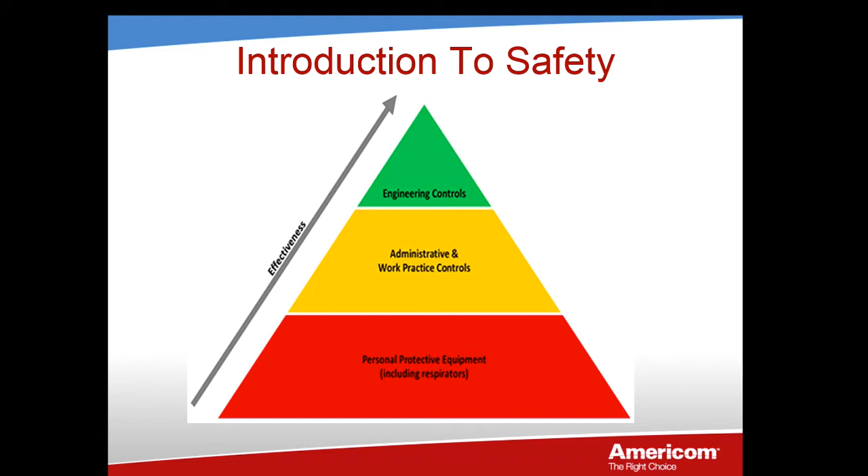So we're going to get into some of the Americom policies regarding safety. This is a serious subject but it needs to be discussed. Grounds for removal from the project - this is your fair warning. Failure to follow Americom's safety policies and our OSHA standards can be cause for removal from a project. Failure to wear your PPE, fighting, weapons possession, and alcohol or drug use or possession on a company project.

Fit for duty, your emergency notification information. Basically that means, do we have your personal contact information? Do we have somebody we can notify in case of an emergency - a friend, a family member? Does HR have this information? If not, please contact Becky Bowman and make sure she has that information.

Make your supervisor aware of any medical problems. So if you have diabetes or asthma, or if you have any required medications, make sure they're aware of that and they know what those requirements are. So if something happens to you, they can help you and better understand your situation. We're not saying you should tell everybody, but just make sure your supervisor is aware if you have any special needs such as that.

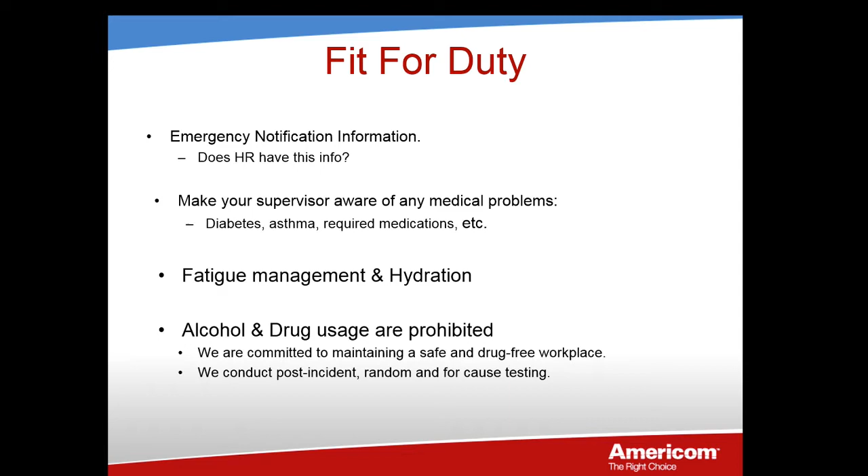Our alcohol and drug usage is prohibited. We are committed to maintaining a safe and drug-free workplace, and just be aware that we do conduct post-incident, random, and for-cause drug and alcohol testing.

So I mentioned this earlier - before you start work, identify and discuss all safety hazards present on the job. If you're not sure what those are, make sure you ask your supervisor. Develop a plan, conduct a toolbox talk, and complete the JHA forms. We have a job hazard analysis form that we require you to complete before you start any job, and that requires you to identify any of the hazards that may be present, so everyone on that project is aware of those hazards and we can prepare and plan to make that project safe.

Make sure you have all your necessary and required personal protective equipment, and I'll go over what that is in the next few slides. Inspect all equipment and tools for hazards before using. Just know that any damaged or compromised equipment should not be used and should be removed from service until it's fixed by a certified professional to make those repairs.

Discuss emergency action planning. Emergency action planning is what we're going to do if there's an emergency - which hospital are we going to go to, who's our first responders, how are they going to get there, do we have the ability to communicate, where's our rally point? Those are all things that need to be discussed at the beginning of each shift, so everybody knows where to go and what to do in the event of an emergency. Does everybody know where the first aid kit is located? I'll go over the emergency action planning in a little more detail in the next few slides.

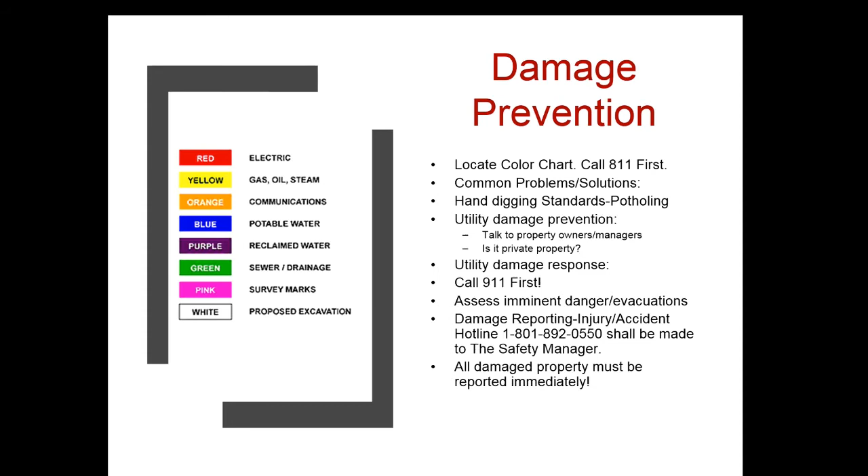Compliance inspection procedures: since we are a construction company subject to OSHA regulations, we could be subject to an OSHA inspection or investigation at any time. This is our policy on how we're going to work through that process.

So what should you do if OSHA shows up on the job? Immediately notify your supervisor, superintendent, foreman, and the safety manager. Do not allow them to walk around the job freely. Advise that you need to obtain your supervisor's permission before you allow them to walk about the project.

OSHA is required by law to follow certain procedures during inspections. First, they must present their credentials. Then they conduct an opening conference, where they meet with the management team to discuss their concerns - maybe they received a complaint, and that's the point where they'll bring it forward.

Once everybody's comfortable with the opening conference, they'll conduct a walk around, where they typically identify any issues or concerns. Then they'll bring those issues to us at the closing conference, and issue citations if they feel that's appropriate.

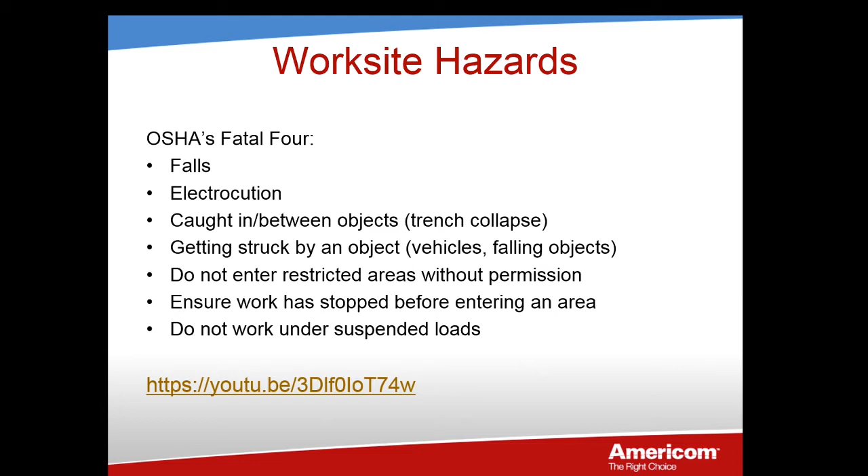So again, continuation of construction's fatal 4 hazards. Out of 4,674 worker fatalities in the private industry in calendar year 2017, 971, or 20%, were in construction. That is 1 in 5 worker deaths in 2017 were in construction.

The leading cause of private sector worker deaths, excluding highway collisions, in the construction industry were falls, followed by struck by objects, electrocution, and caught in between, as we just saw in the last video. These fatal 4 were responsible for more than half, or 59%, of construction worker deaths in 2017.

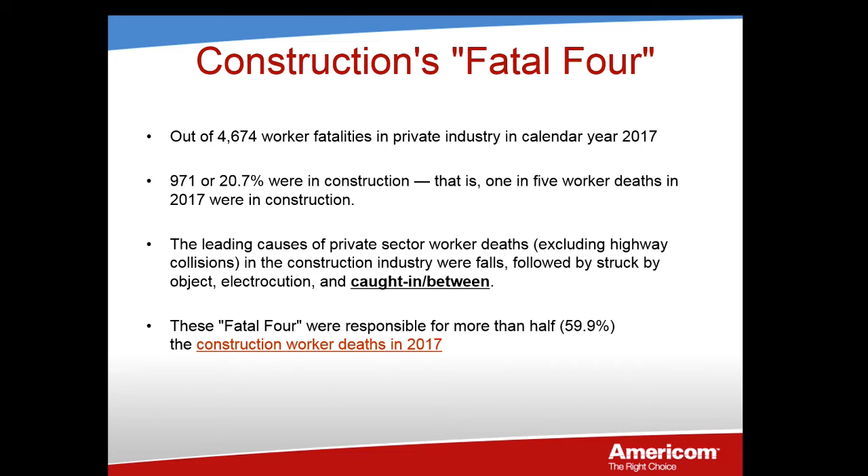So some pretty compelling statistics there. And this is the data that OSHA uses to identify what those fatal 4 hazards are.

The other personal protective equipment that you might need - are you prepared for the weather? Are you prepared for the heat or the cold? Do you have water, food, sunscreen, clothing? Obviously, those things will not be provided by Americom.

Our policy is that you must wear long pants, no shorts, and a long or short sleeve shirt, no tank tops. Footwear must be durable leather with a slip-resistant sole. Some jobs require steel-toed boots, so you'll need to ask your supervisor if your project requires them. Americom doesn't have a policy requiring steel-toed boots - it's a good idea and I recommend it, but bare minimum, you just need a durable leather boot that goes up over the top of the ankle to protect your ankle.

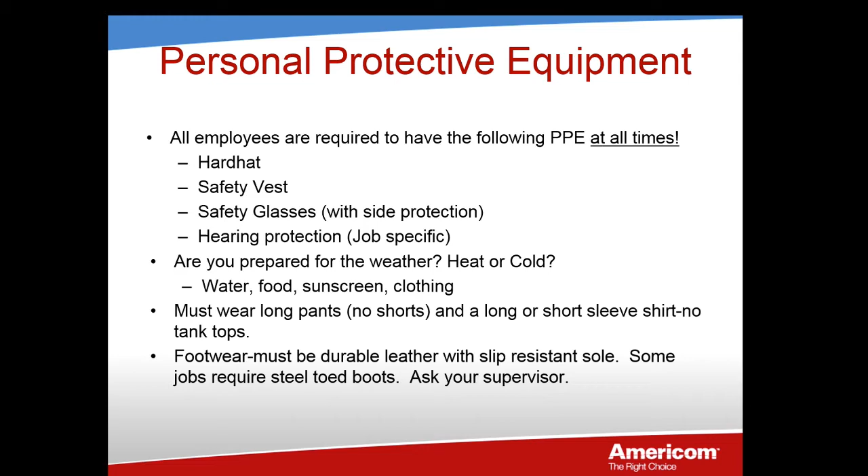Some ways that we can prevent our ergonomic injuries are by conducting warm-ups, stretching, and flexing. We've implemented a stretching program to try to prevent injuries associated with repetitive motions. All work performed should utilize safe ergonomics and lifting practices.

Try to do 3 to 5 short stretches per day. Stretch before you start work, stretch in the middle of the day or when you get the opportunity, stretch after lunch, and then stretch after the work day's done. The stretching and flexing will help you prevent injuries down the road and throughout the day.

Going back to our safety triangle, if you're doing a lot of repetitive motions and you start to feel a strain, we can implement administrative controls to try to manage those types of repetitive motion injuries.

After prolonged static posture, such as driving to the job site, or after doing a lot of repetitive job tasks, these are the types of injuries that can occur. You're lifting with your back instead of your legs. You want to make sure you have good posture when lifting something, especially a heavy object over 50 pounds. If you're worried it could hurt your back or it's in an awkward position, find someone to help you move it rather than trying to move it yourself.

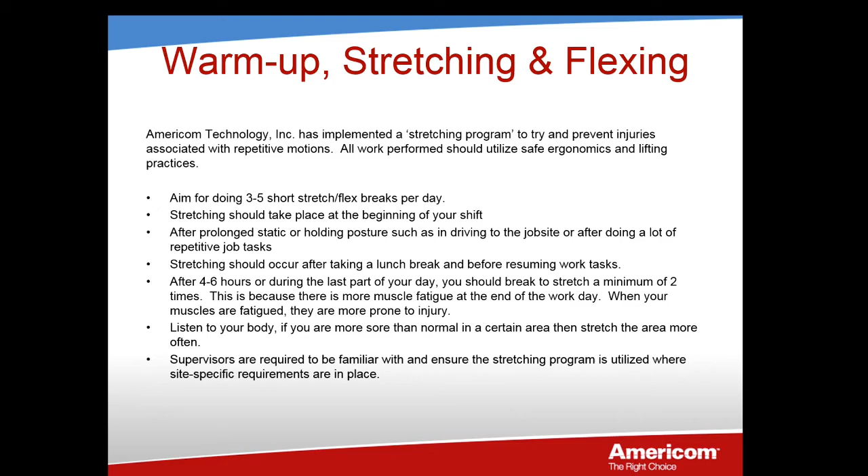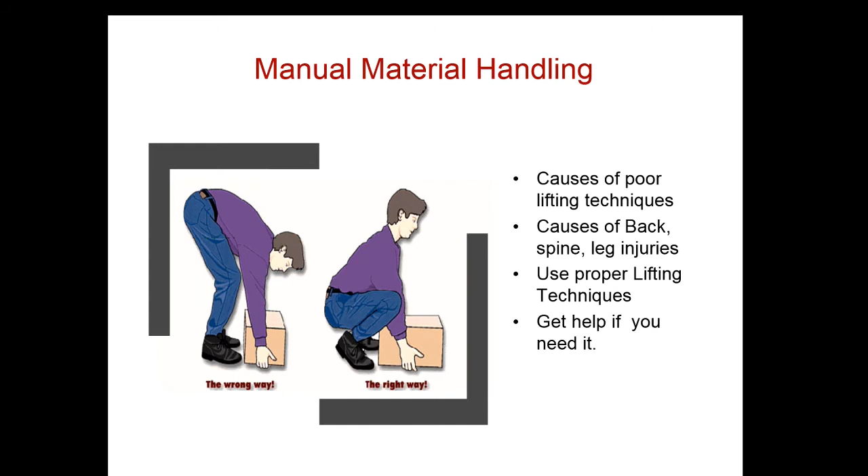These are some of the causes for poor lifting techniques, and causes for back and leg injuries. So again, use proper lifting techniques, and get help if you need it.

We also have a heat and cold stress plan. While working in hot weather conditions, the human body may not be able to maintain a normal temperature just by sweating. If this happens, heat-related illnesses may occur. The most common health problems caused by hot work environments include heat stroke, heat exhaustion, heat cramps, heat rash, and dehydration. Some prevention methods include acclimation—acclimate to the area you're working in.

Again, we talked about engineering controls—maybe we need to get some fans or evaporative coolers in there.

Safe work practices: for employees working outdoors or indoors without heat, take scheduled breaks in warm areas. Listen to your body and make sure you're not exerting or overwhelming yourself. Ensure there's plenty of water to drink or fluids with electrolytes, and take breaks as needed. Immediately report any problems to your supervisors. Supervisors should consider scheduling work around weather conditions. So let's work smart, not hard.

Personal protective equipment is an important factor in preventing cold stress-related injuries and illnesses. Employees should adhere to the following recommendations when dressing for work in a cold environment—if we're working in a cold environment, we want to wear layered clothing.

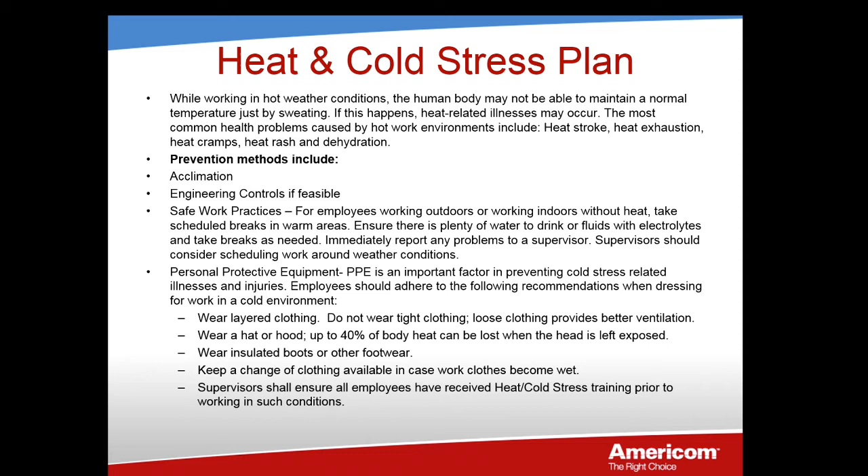Supervisors shall ensure all employees have received heat cold stress training prior to working in such conditions. So if you're a supervisor, just know that, make sure you're talking about this as part of your toolbox, your morning JHA toolbox talk. Hey, it's going to be cold today. We got to make sure everyone's got the right personal protective clothing. And if someone doesn't, make sure that they get it, or they obtain it before they come to the job.

Our hazard communication, that's a term you'll hear in the safety regulations. It's also known as HAZCOM. It's a globally harmonized system. It's called the GHS system. It ensures information about chemicals, including information and ingredients, can be universally communicated.

So basically what that is, it's talking about the safety data sheets. Those are the sheets that a manufacturer of a chemical will put out, and pre-identify all the safety hazards or precautions you should take while handling that chemical or that material. SDS sheets are available here at Americom in the main offices, and should be available on the job site, if you are working with those types of chemicals.

Safety data sheets provide all information necessary to safely handle a particular chemical, must be readily accessible to all employees using a hazardous chemical, and any chemical identified with a label that states danger, caution, or warning must have a safety data sheet. So again, this is our HAZCOM, and if we're introducing or working with a chemical that we're not familiar with, make sure you take the time to review those safety data sheets so you're educated and prepared, and you have the proper and necessary personal protective equipment while you're handling that chemical.

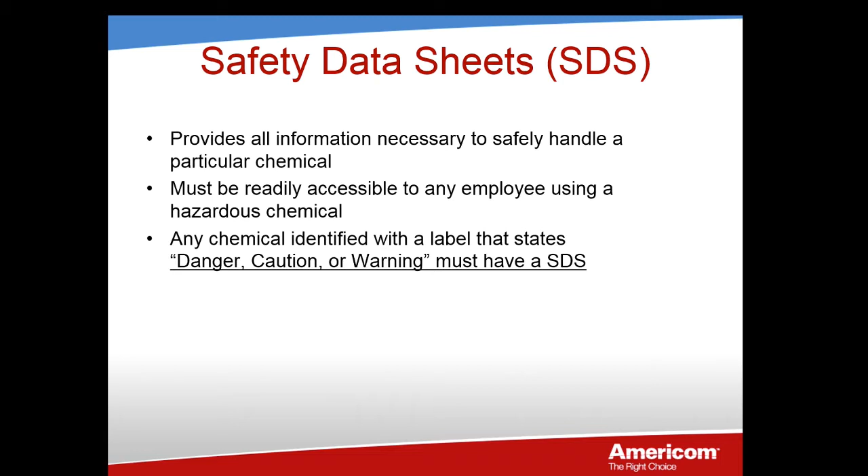Okay, now we're going to get into our electrical safety and GFCIs. So recognize hazardous energy sources. If we're working in and around electrical or hazardous energy sources, point that out to everyone there on the crew. Make sure they're aware of it.

OSHA requires that GFCIs are used, inspected, and tested. Electrical cord inspection and use. Damaged and defective electrical equipment should not be used and should follow proper procedures.

Locks, tags, lockout, tagout, control hazard energy sources. So if you can control that energy source before you start the work, what that means is we would want you to lock it out, tag it out, shut it down, de-energize that energy source before you go in and perform the work you need to perform, so that project or that job site is safe for you and everybody there.

Overhead line protection, make sure you're pointing out overhead power lines to everybody there on the crew. Again, that should be discussed as part of your JHA job site safety toolbox meeting first thing in the morning. Identify the clearance distances and shielding. If you need any shielding in place, you can set up barricades to keep people from encroaching or getting too close to those overhead power lines.

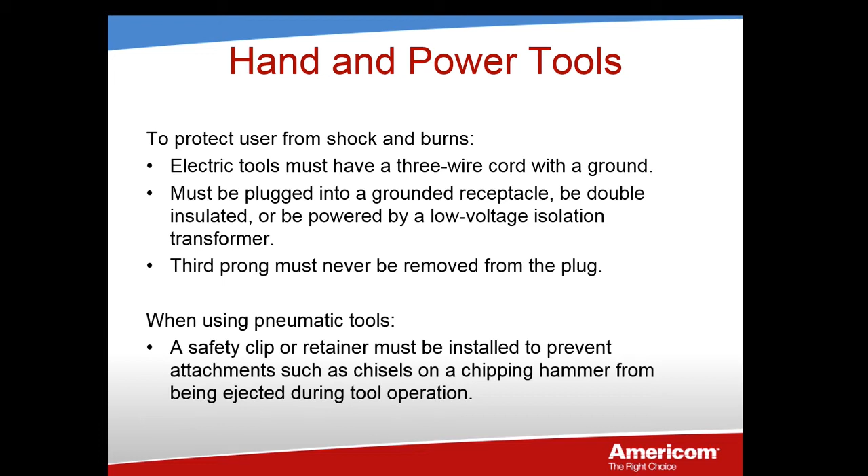If an air hose is more than a half inch in diameter, a safety excess flow valve must be installed at the source of the air supply to reduce pressure in case of hose failure. Pneumatic power tools must be secured to the hose with a whip check device to prevent accidental disconnection.

Most of our air hoses and pneumatic air tools have that feature built into the hose - it's a little clip that clips into the tool you're using. You don't ever want to use an air hose that doesn't have that on there, because that air hose could come off and start whipping around and hit you or somebody else on the project.

Powder actuated tools operate like a loaded gun and must be treated with extreme caution. You're technically required by OSHA to be trained and certified before using powder actuated tools. If you haven't had that training, notify your supervisor, make them aware you haven't been trained. Proof of training must be with your operator at all times - similar to a driver's license or forklift certification, you've got to have that certification that you know how to use that powder actuated tool.

The forces generated from that tool are similar to a firearm. If you use that tool incorrectly, say you're using a Hilti gun and punching nails into concrete, if it's not used correctly, that nail could easily go through soft tissue or bone and cause very severe injuries.

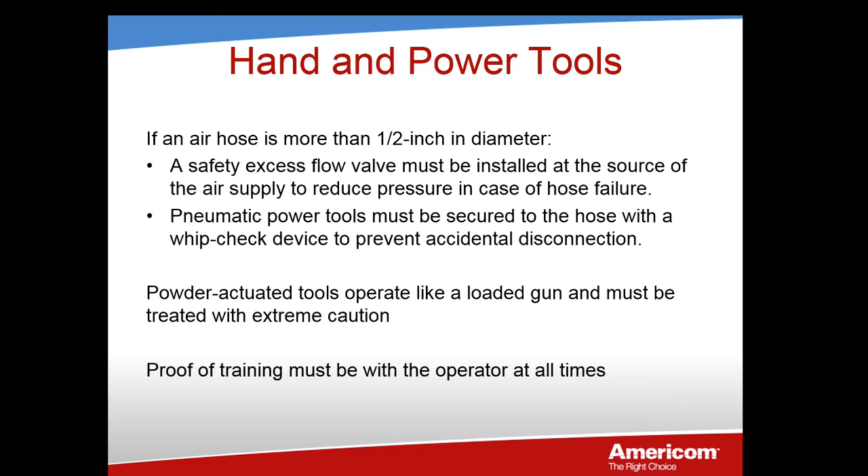Moving on to ladder safety. We want you to choose the right ladder for the job and inspect those ladders daily. Damaged ladders must be removed from service. So if you see any ladders that are bent or dented, or don't seat properly, they're out of balance, they need to be removed, and you need to get a different ladder.

As you're using the ladder, you need to maintain 3 points of contact when using it. So what that means is you have 2 feet and 1 hand on the ladder, or 2 hands and 1 foot.

Secure the ladder. We must have 3 feet above any landing. So if you're using just a regular ladder that props up against a building or a platform, there needs to be 3 feet above that platform that you're accessing, per OSHA regulations.

Always face the ladder when ascending and descending. You never want to walk backwards down the ladder.

Don't reach out past the rungs of the ladder. Get down and move the ladder if necessary. So if you're on the ladder, the rule of thumb is if your belt buckle or your belly button extends out past the outer rail to either side of the ladder, then you're outreaching and you're putting yourself at risk for a fall or injury. So just, again, slow down, take your time, get down, move that ladder if you need to.

The ladder must be rated for the intended load, so that's combined weight. So for example, if you're a 250-pound man, but you're only on a ladder that's rated for 200 pounds, then you've got to get a different ladder. You've got to get a ladder that's rated for not only your body weight, but the weight of the material that you're working with or using.

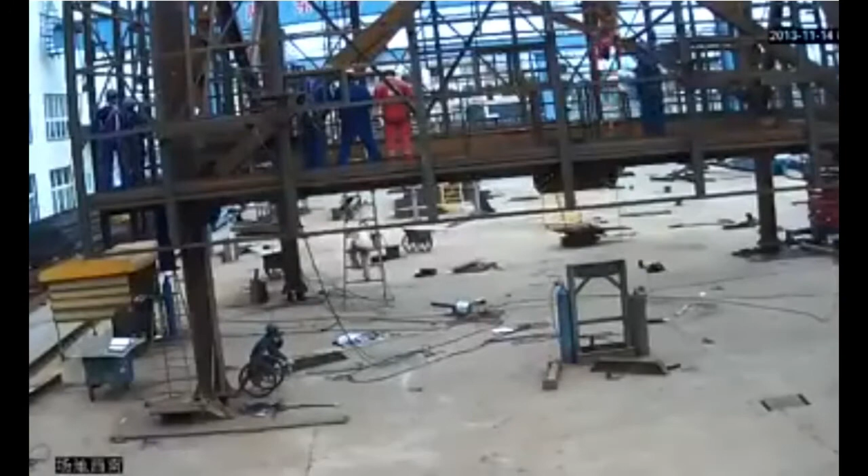So here we have a multiple level project. We got people working below and we got people working above. I want you to pay attention to this gentleman right here with the plans. Here he's carrying a set of plans up the ladder and he loses his balance and falls. So pretty serious injury there.

If everybody noticed, his arms were straight up in the air when he landed. That's an indicator that he was immediately knocked unconscious and likely suffered pretty severe internal injuries, if not head injuries. If you notice, when he came down, he landed on his shoulder blades, his back, and his head.

The point being here with this video is, again, we want you to use ladders safely, but never carry anything up the ladder. Use a helper. So if you're working on a ladder and you're working with materials, we want you to ascend to the work area where you're going to be using the ladder, and then have someone lift the materials up to you. Have them hand the materials to you rather than you try to carry those materials up yourself.

Some ways that we can do that is we can use ropes. Somebody on the next level could be lifting that material up to you with a rope. But again, we never want you to try to lift that material up the ladder by yourself. And same, if you're using, say, a long 2x12 or something to that effect, we don't want you using multiple ladders with multiple people on the ladder and then trying to lift that material up into place. We need to find another means of getting that material to the area where we're working on that ladder.

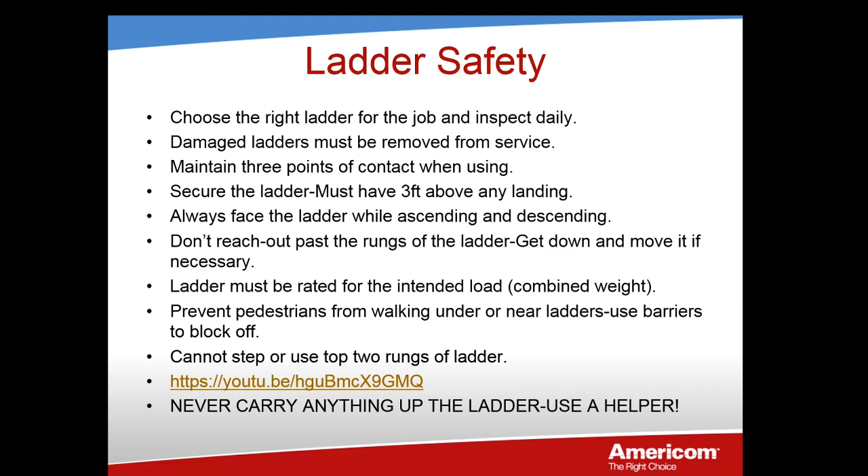So when do you need fall protection? OSHA says in the construction industry, if you're more than 6 feet above the ground or any working area, and you're not protected by a system of guardrails or safety nets. So if you're up on a second level and there's no guardrails that would prevent you from falling, then you need to have fall protection, or you need to wear fall protection. I'll explain what that is here in just a second. Or there needs to be safety nets, which are objects or safety devices that extend out past the platform and are designed to catch you in the event you fall off that platform.

So again, you must be tied off above 6 feet. You need to wear a body harness. You need to inspect your harness daily and make sure it's not damaged, and if it is damaged, it must be removed from service. Make sure you're always connected before starting your work. So if there's no other guardrails or safety nets in place, then you need to wear a harness. The harness needs to have a lanyard connected to some sort of device that will prevent you from falling.

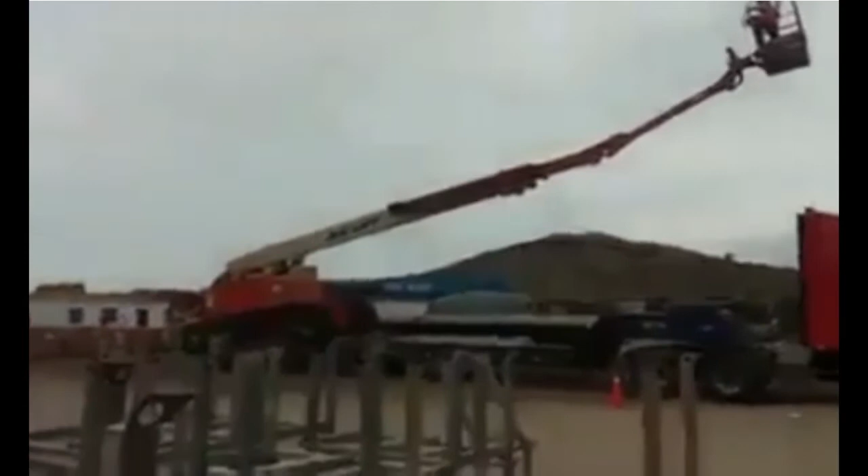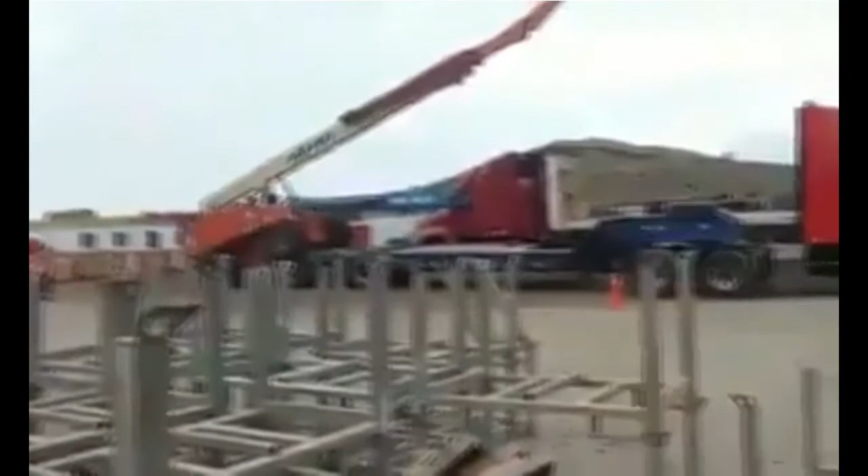So here we have a gentleman up here, you can see on the top right, that's operating a boom lift. You can't really see him right now, he'll come into picture here in just a minute. But he loses control of this boom lift, and he actually gets ejected out of it. The only thing that saved this gentleman's life, I believe this person would have received fatal injuries had he not been wearing fall protection. You see here, he's trying, I'm not sure what he's doing or what he's trying to get to, maybe this power pole here on the right. But you'll see here, he tries to lower the boom on the lift and then loses control of it.

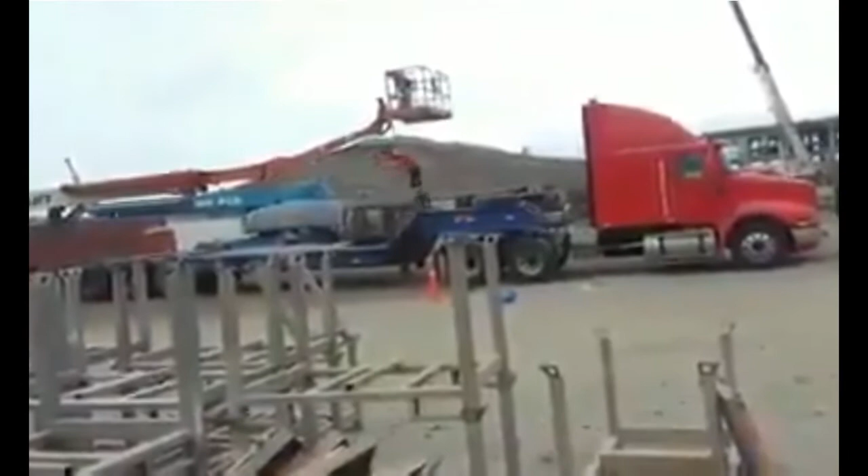So this guy, he's alive, he's still conscious, he's still moving. He's definitely going to be sore in the morning, but that fall protection saved his life. So again, he was probably 20, 30 feet in the air. He's required to have fall protection while operating this boom lift, and that, in this particular incident, saved his life.

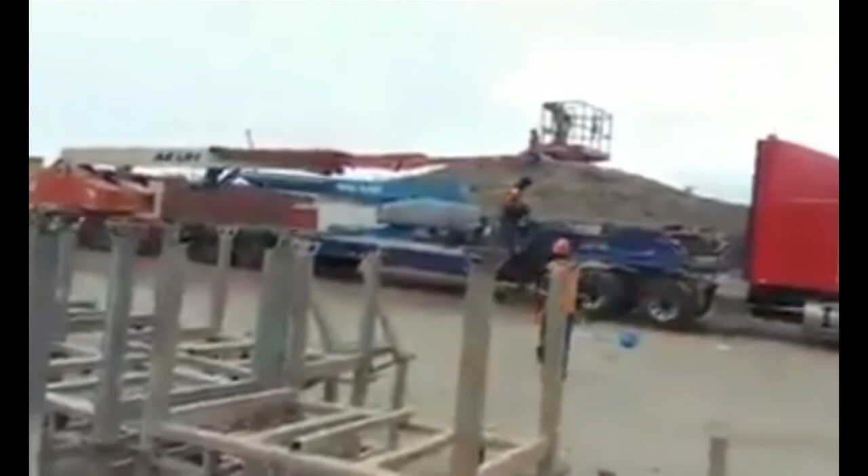These crew members will go over and help him get down here. You can kind of see here, I'm not sure if they even had a plan on how they're going to get him down, but another gentleman lowers the boom the rest of the way and they get him down safely. But people were kind of standing around there wondering, I think they were in shock and not sure of what to do.

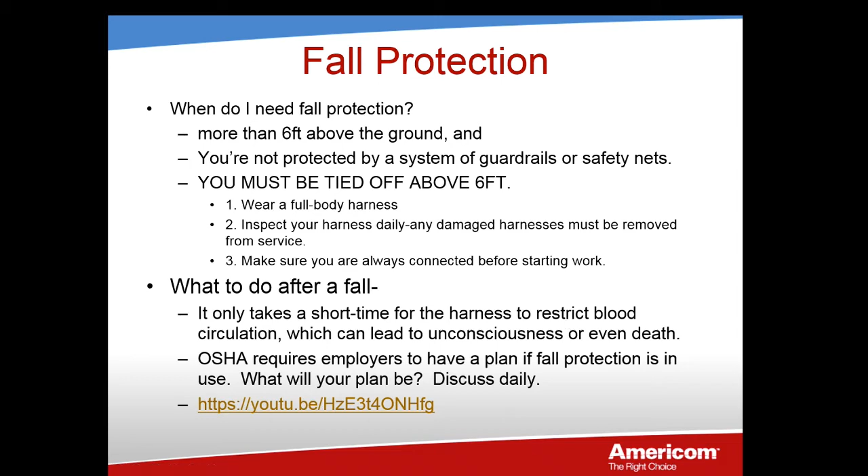Okay, so moving on, we're going to talk about heavy equipment operations. Heavy equipment is our backhoes, our mini excavators, our large trucks, dump trucks, mud trucks - anything classified as heavy equipment is going to be probably most of our commercial vehicles, or not probably, but will be all of our commercial vehicles. Anything that has a very high weight rating.

Do not operate vehicles in reverse with an obstructed rear view unless it has a reverse signal alarm capable of being heard above ambient noise levels, or a signal observer indicates that it's safe to move the equipment.

So signal observer is just a spotter - you're basically recruiting someone to help you move that heavy equipment, to be an extra set of eyes and ears. If you need to move a piece of heavy equipment, that person's going to help you be aware of blind spots. You want to make sure you understand and know what your blind spots are in that heavy equipment.

I'll show you a slide here in a second that shows you how big some of those blind spots can be. Make eye contact with the operator when entering their work area. If you're moving heavy equipment, you're working with somebody and making eye contact - maybe you need to use hand signals or radios to communicate effectively. Make sure you've got a plan in place when you're moving that equipment.

Did you realize backing accidents are the leading cause for all DOT vehicle accidents, including single and tandem dump trucks, which the majority of you will be driving, as well as tractors with lowboy trailers and even pickup trucks. Backing is one of the more difficult vehicle maneuvers to master, especially with larger type vehicles. It shouldn't be taken for granted. The Smith system is used as a teaching method for DOT fleet safety training. It emphasizes to the driver to aim high in steering, get the big picture, and keep your eyes moving. This may seem like a simple and practical approach when you're going forward, but when backing, it's a different story.

Inattentiveness, distractions, being rushed, and common carelessness are contributing factors in most backing accidents. Being distracted even for a few seconds can lead to a critical error when it comes to backing. When we're backing, we need to get the big picture so that we know what is behind us or what could possibly move into our backing path. Carelessness causes too many backing accidents resulting in injury or damage. Many of these accidents could have been prevented if individuals were more attentive and cautious. Failure to do so may compromise our safety and the safety of others around us.

Stop! Stop! Hey! Stop!

As a general rule, avoid backing unless you absolutely have to. When backing is required, use extreme caution and know what's behind you.

Survey the area where backing is to occur as you pull in. Choose the best backing path and pull forward until you're properly aligned. Get out and look at your blind spots and check for adequate clearances in your backing path.

Typically, your blind spot directly behind the dump truck can go back as far as 90 feet for workers standing. If that worker is stooped over or kneeling, as would be the case for someone inspecting the roadway, the driver's viewing distance using side mirrors increases even further.

Worker cannot be seen in driver's side mirrors at 25 feet. Still can't be seen at 50 feet. Even at 75 feet, worker can't be seen. Finally, at 90 feet, the worker can be seen in side mirrors.

You must always know what is directly behind you prior to backing. If a spotter is not available, complete a walk-around. Having a spotter is the preferred method. If a spotter is available, make sure you agree on hand signals to be used.

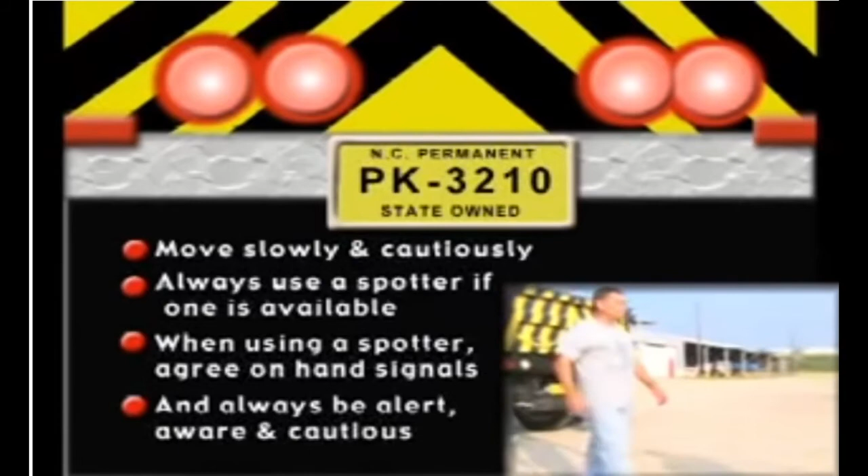When using a spotter, agree on hand signals. And always be alert, aware, and cautious. Our DOT family needs employees like you to help keep our coworkers safe. You are under tremendous pressure and challenged to do your job in a safe, efficient manner. Please don't forget, on the job, as in life, always watch your back.

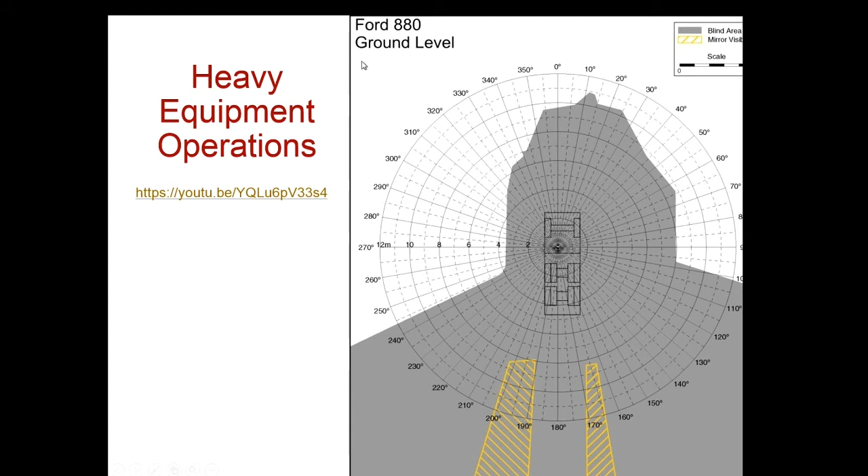Okay, so we're going to move on.

So now we're going to talk about directional drilling. This is one of the main types of work we do here at Americom. And so we're going to discuss the hazards with directional drilling.

So the hazards that come into play when operating or working in or around a drill are your caught-between hazards, loading and unloading. So if you're loading the drill on a trailer or off the trailer, we're talking about moving heavy equipment, and we need to be using a spotter. We need to make sure that we're not going to back or load that piece of equipment and get something or someone caught between that piece of equipment.

As we're moving it, we again want to use a spotter, make sure we're not going to strike anything or anybody with it. If the drill's being used, and we're drilling a bore in the ground with the drill, it's got rotating, moving parts. You want to make sure you keep that area safe so that someone or something doesn't get drawn into the rotating parts and pulled into that machinery.

Falls: the drills aren't that big, but we do have some drills that are fairly big, and we want to make sure that we're conscious of any falls that could come from working in or around those drills. Especially if we've excavated and there's an open hole in the ground, there could be a potential to fall into that hole, just depending on how deep it is.

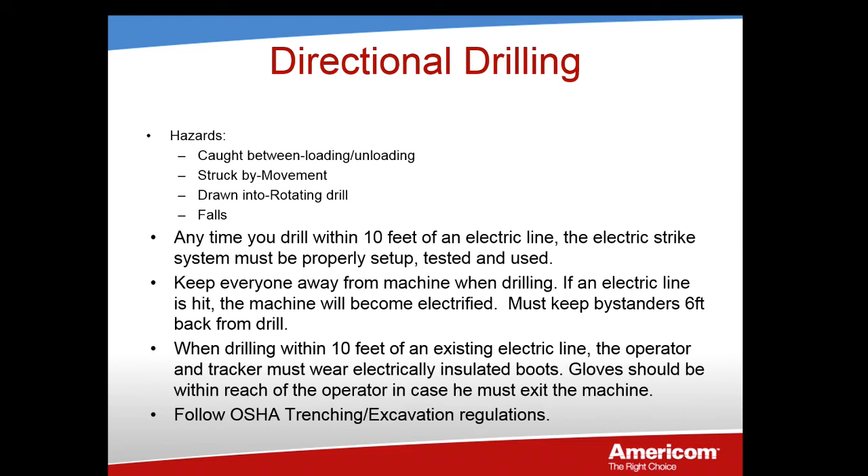And if there are any open excavations in and around the drill, we're required by OSHA to follow the trenching and excavation regulations, and I'll talk more about that in the upcoming slides. So, excavations.

An excavation is any man-made cut, cavity, trench, or depression in an earth surface that is formed by earth removal. A trench is a narrow excavation in relation to its length made below the surface of the ground. In general, the depth of a trench is greater than its width, and the width measured at the bottom is not greater than 15 feet.

Please note, if a form or other structure installed or constructed in an excavation reduces the distance between the form and the side of the excavation to 15 feet or less, measured at the bottom of the excavation, it is also considered to be a trench.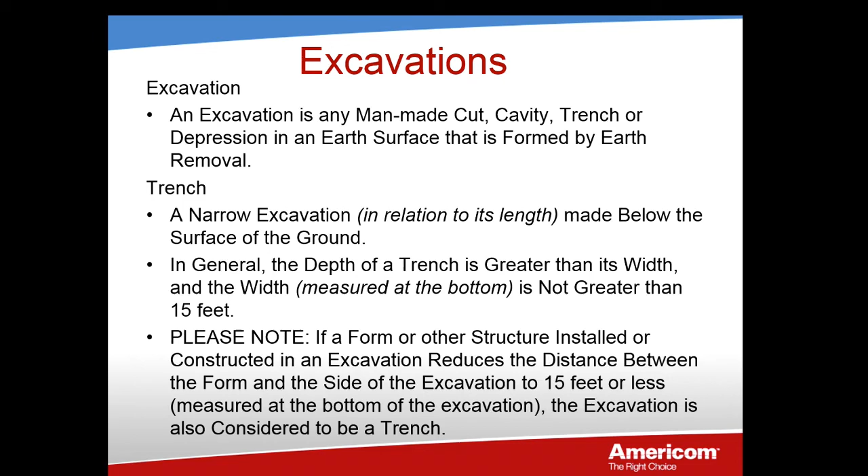So what are the requirements? Utilities must be staked before you dig, we've already discussed that. You must conduct a soil test to determine the best type of protective system to use.

For a soil test, there are 4 different types of soil. There's solid rock, there's Type A. Type A means it's undisturbed soil, it's never been touched before. Type B means it's solid, clay, hard soil, but you can tell it's been disturbed. And then Class C soil is your sandy, loamy soil, and basically has no consistency. You can't roll it up into a ball, or it just doesn't stick in any way, shape, or form.

Excavations or trenches 5 feet or more in depth require benching, shoring, or trench boxes. So it requires some sort of protective system be utilized if the trench is deeper than 5 feet.

Excavations or trenches 4 feet or more in depth must be monitored for hazardous atmospheres. So what that means is if you've dug a trench near a sewer line and it's 4 feet or more in depth, then you need to conduct a hazardous atmosphere test to make sure that none of those sewer gases are in that trench and would pose a hazard to the worker in that trench.

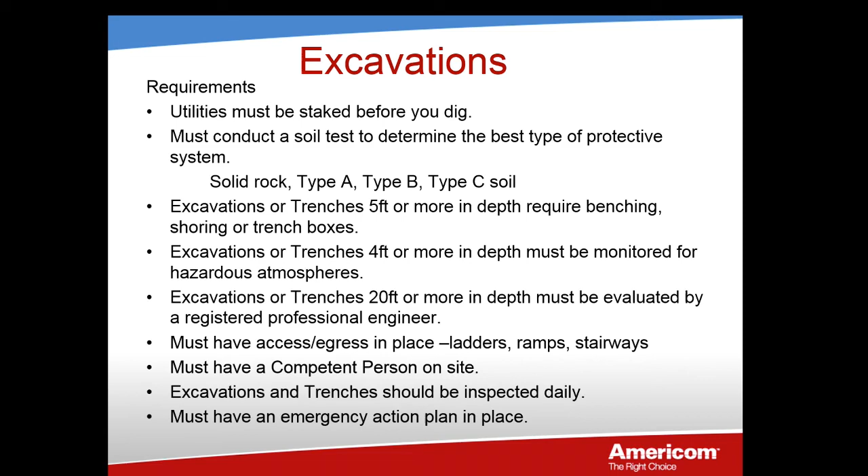Here's a slide with two photographs. On the right, a good demonstration of a proper excavation with the proper safety measures in place. On the left, a photograph of an excavation with essentially no safety precautions in place. I'm very nervous and scared for the gentleman down in that trench. That soil looks like type C soil to me - pretty soft, pretty sandy. There's no way that gentleman's going to get out of that hole if it caves in on him. On the right, you can see they've got forms in place that extend up higher than the excavation itself. So if that excavation does collapse or cave in, those shields are going to protect anybody down in that hole.

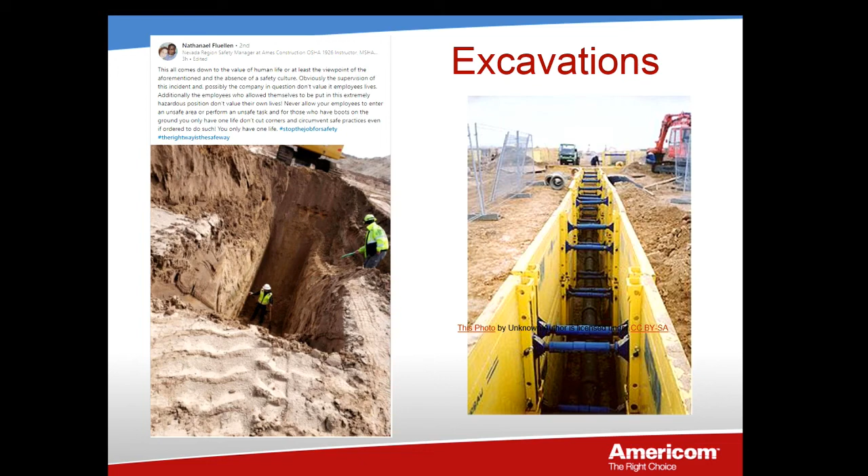This occurred in Alpine, Utah, just back in April. This was a man who died in a trench in Alpine, Utah - I believe he was installing a swimming pool. There were essentially no safety precautions in place, and as he was down in the hole, the trench collapsed and killed him. These things do happen, and they happen here locally. Going back to some of the previous slides - if we're conducting work in and around excavations and trenches, and it's deeper than 5 feet and it doesn't appear safe, or there's water in the hole, or you're not comfortable with it, we need to stop, evaluate, and get the proper protective measures in place to make sure that trench or excavation is safe before we enter and perform any work.

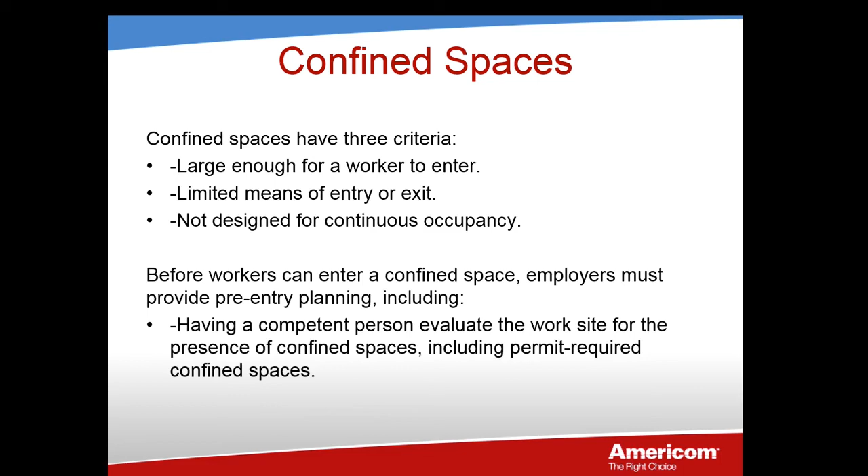Okay, so we're going to move on to confined spaces. Confined spaces are one of the most dangerous work areas in construction, and the OSHA regulations are very specific. But today, since this is a new hire orientation safety training, we're just going to cover the basics. First I'll define what a confined space is. Confined spaces have 3 criteria: they're large enough for a worker to enter, they have limited means of entry or exit, and they're not designed for continuous human occupancy. Before workers can enter a confined space, employers must provide pre-entry planning, which includes having a competent person evaluate the worksite for the presence of confined space hazards, including permit required confined spaces.

Just know that there's a difference between a permit required confined space and a non-permit required confined space. The difference is: if we're down in a vault or a hole and there's absolutely no hazards, we've monitored the environment and atmospheric hazards and identified there's no hazards - we've identified that the oxygen level is where it needs to be. Hazardous atmospheres must be eliminated or engineering controls must be in place, and oxygen must be between 19.5% and 23.5% for it to be safe. So if there's no electrical, no water, and the oxygen is sufficient, then we could potentially call that a non-permit required space. But if we identify there's electrical in the hole, oxygen deficiency, or maybe some caustic gas down in the hole, then that is a permit required confined space, and we're required to follow certain procedures to render that confined space a safe environment to work in.

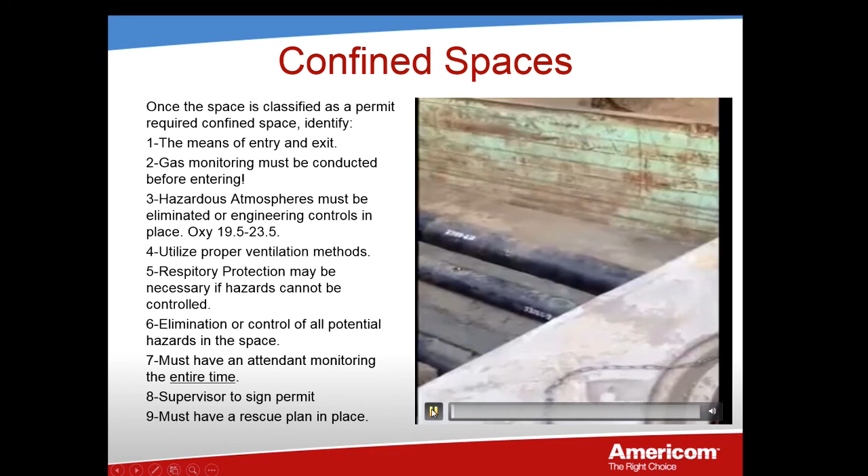I'm going to play a video here that shows a confined space situation that goes bad, and then we're going to talk about it. As they're working in here, I want you to pay attention to the things that they're saying.

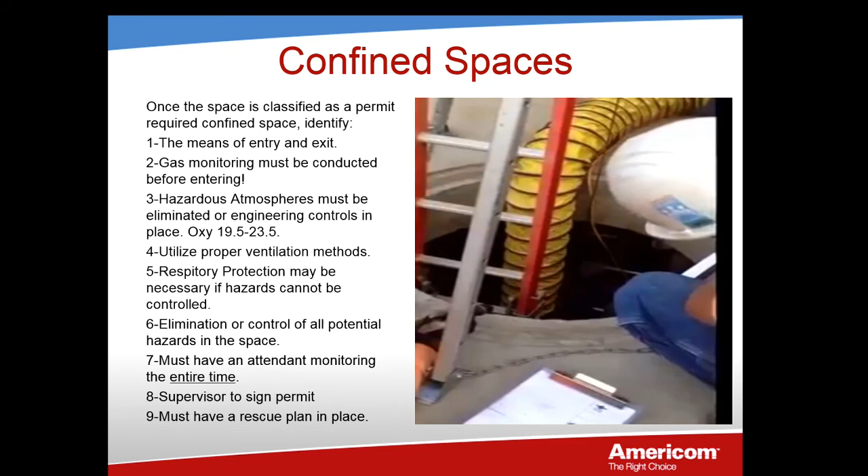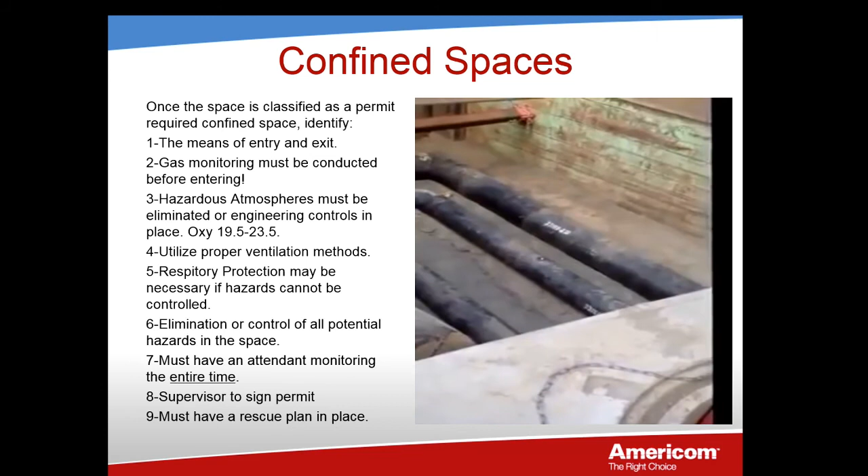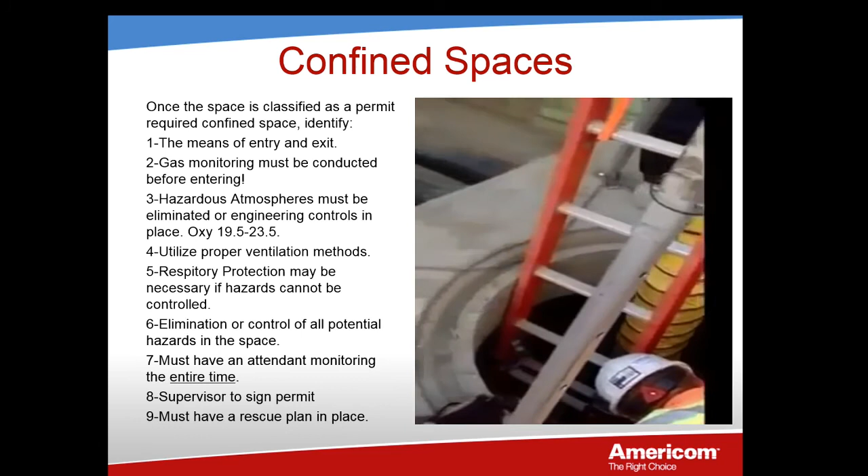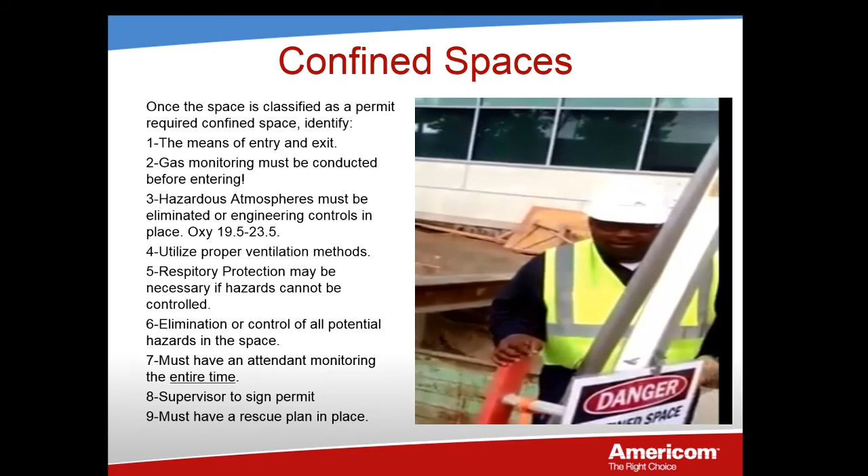I wouldn't want to be in that hole right now. You kidding me? I know. Couldn't pay me enough to do that, Joel. You guys wonder why we check that? That didn't sound good. That's why we check torque on bolts, guys. Yeah, Joel, maybe you should step out for a minute so that thing settles in. Yeah, no.

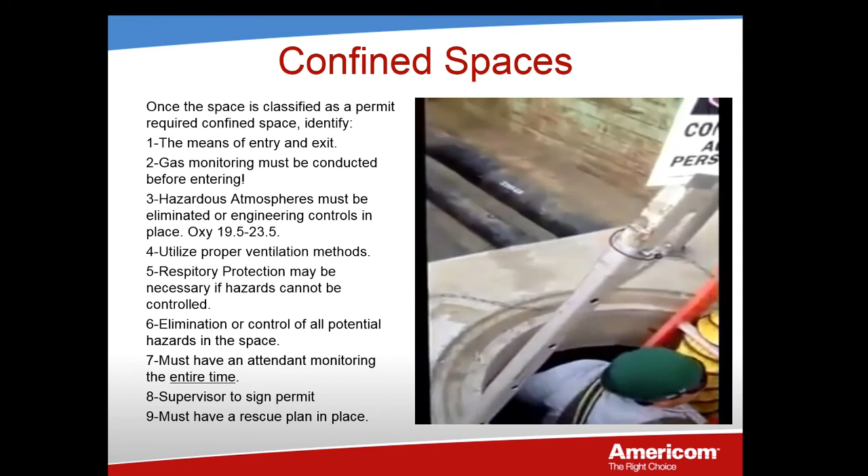Okay, so I'm going to stop the video there. There's not much more to see after that. This video does have a happy ending - this worker does survive. He's just blown out of that hole and banged up pretty good, but he does survive.

These gentlemen were working in a confined space or manhole where there were steam pipes, and I think you could hear at the beginning that loud clunking sound. That was some sort of problem occurring with the steam pipes themselves, and eventually the pipe ruptured and blew him out of the hole.

But more importantly, I want to discuss some of the things they were saying. At the beginning of the work, it looks like they had everything they needed in place. They had their access and egress in place - you saw the ladder coming out of the hole. They had their ventilation in place. They had a tripod set up, and they had the gentleman hooked up with a safety harness, and that safety harness was hooked up to the tripod so they could winch him out if needed. They had a danger sign in place.

But more importantly, some of the things they were saying, like 'man, you couldn't pay me enough to be in that hole' or 'hey Joel, maybe you shouldn't be down in that hole' - everybody needs to understand as you're watching this video that if you're not comfortable with the work being conducted and you're making statements like that, then we need to be more decisive and just get that person out of the hole.

So we're going to touch briefly on crane operations. We don't do a lot of work here at Americom with crane operations, but we do have some cranes on the drills that we own and operate. So we're going to touch on this briefly.

Crane ground conditions: the controlling entity must ensure ground conditions are safe for the crane to be assembled and used. During assembly and disassembly, the director determines if safe ground conditions are present. That's basically the person in charge, whoever's running or operating that crane or certified to use it. They're in charge of making sure it's set up and assembled properly, and that the area they're working in is safe.

Again, OSHA standards are that nobody is allowed to work under or near a crane as it's being operated. Cranes must remain a minimum of 10 feet from overhead high voltage lines. So there's that 10-foot rule again.

The employer must assume that overhead high voltage lines are energized unless the utility confirms they are not. So again, if you see an overhead power line, just assume it's energized unless the utility company confirms it's not. And if we're going to assume that overhead power line is energized, we need to set up all the necessary precautions and safety measures we've discussed previously.

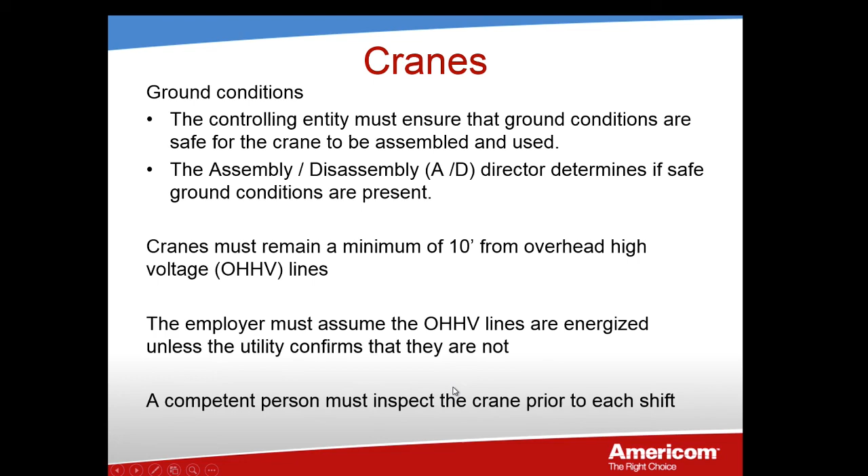A competent person must inspect the crane prior to each shift - that's typically the crane operator, whoever is certified to use that crane. Operators must be certified by one of four entities: an accredited crane operator certification testing organization, an audited employer program, qualification by the U.S. military, or licensing by a government entity.

Swing radius must be barricaded to prevent accidental contact. The employer must ensure each signal person meets the standards qualification requirements. Envision you've got a crane in operation, lifting material from point A to point B. There's always going to be someone on the ground rigging those materials and providing hand signals to the crane operator so material is moved safely. Those two will ensure that crane zone area is cordoned off, so people can't access that area or conduct other work while crane operations are underway.

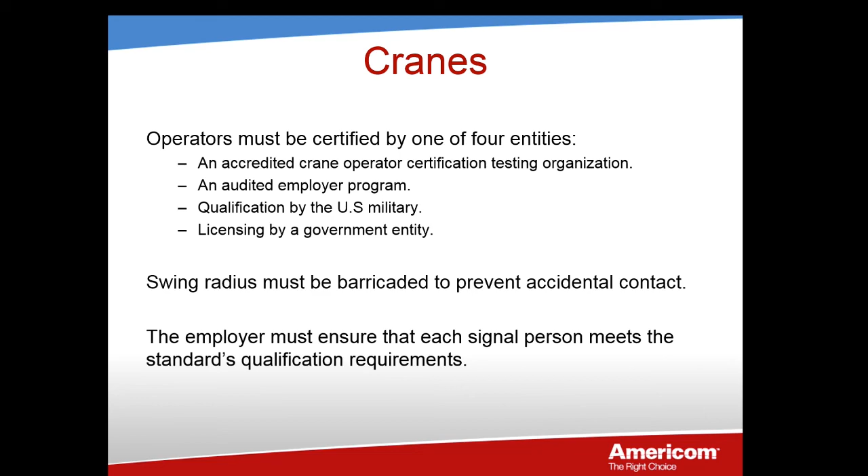So we're about done here with the training. We've just got a few more slides. We're going to talk about first aid and CPR.

Provisions will be made prior to commencement of a project for prompt medical attention in case of serious injury - that goes back to our emergency action planning. First aid supplies will be easily accessible when required, so we've got to have our first aid equipment or kit on the project, and know where it is, either in the truck or in the gang box.

Proper equipment for prompt transportation of an injured person to a physician or hospital, or a communication system for contacting necessary ambulance service, will be provided. So that means we've got to be able to call 911, call in first responders if needed. If we're in a rural area and cell phones or radios don't work, we've got to have other measures in place for prompt transportation of that worker to a medical facility - that's part of your emergency action planning. Injured employees are to be transported to medical facilities by emergency medical services unless it's non-life threatening.

If emergency medical service is not available in a timely manner, the injured employee will be transported to the nearest medical service in a company vehicle by the job foman.

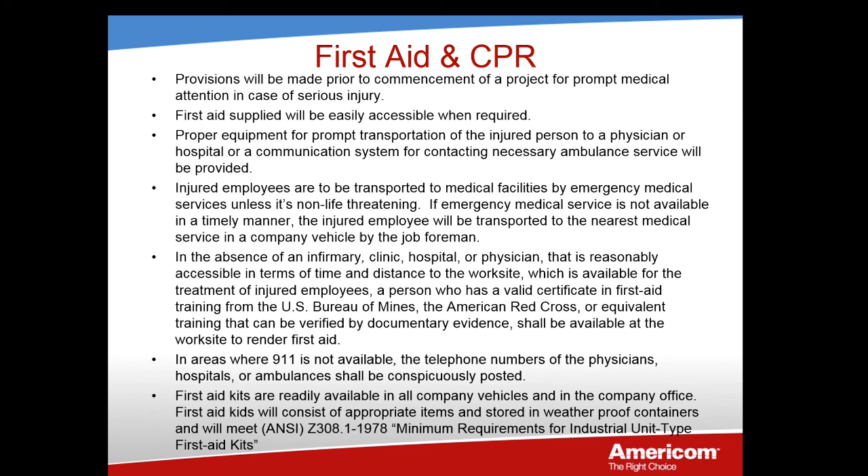First aid kits are readily available in all company vehicles, job sites, and the company office. They will consist of appropriate items stored in weatherproof containers that meet the ANSI standard. All of our first aid kits in our vehicles meet this standard and should have everything you need to take care of minor injuries.

Bloodborne pathogens: if it is reasonably anticipated that employees will be exposed to blood or other potentially infectious materials while using first aid supplies, employers should provide personal protective equipment, including but not limited to gloves, gowns, face shields, masks, and eye protection. You obviously want to protect yourself from bloodborne pathogens.

You'll want to put some gloves on, maybe protect your clothing with a gown, or use a face shield. If you've got an arterial wound that's spurting, you obviously don't want to get that in your face or eyes, so you may need to wear a mask or some sort of face shield. Our first aid kits have all of this stuff in them.

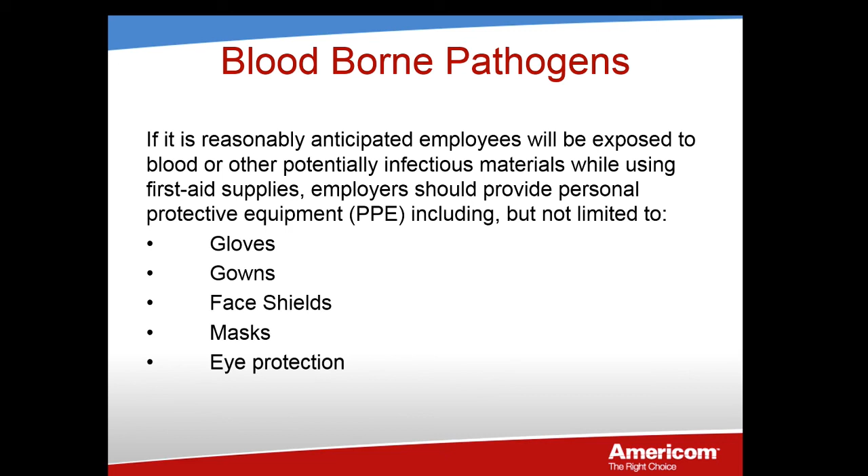Going over some more of our company policies, but they directly relate to safety. So we're going to discuss our cell phone policy. Cell phone use is prohibited while conducting job responsibilities, basically while you're on the job and working.

This applies while operating company vehicles or machinery. Hands-free devices may be utilized in company vehicles, but again, you should not be manipulating or using your phone with your hands while operating any company vehicle or machinery.

You should not be using your cell phone while standing within 10 feet of moving equipment or vehicles. We'd ask you to use your cell phone on your breaks and before or after work whenever possible. We understand there are emergencies, but try to limit your cell phone usage.

Vehicle usage: you must have a valid driver's license or CDL to operate a company vehicle. You must conduct daily vehicle inspections, checking the mechanical issues with that vehicle, and also checking all of your safety equipment on that vehicle.

Check your headlights, your turn signals, your hazard lights. Again, you're going to make sure you have your first aid kit and a fire extinguisher. You're going to ensure you have all required safety equipment in your vehicle.

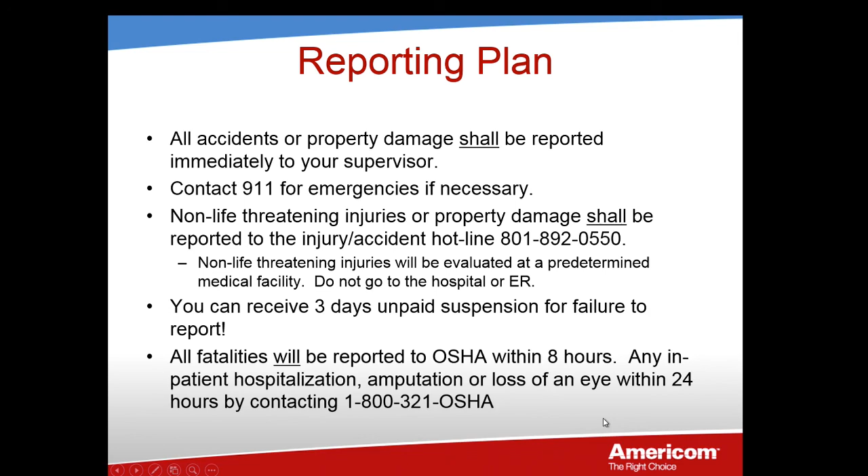So we're at the end of the safety orientation. Just know that safety is everyone's responsibility. If you see something, say something. You can contribute to saving yourself or your coworkers from injury and or death. That's really important. Just know that you have the ability to stop that work, make decisions, and know that you have a voice when it comes to safety.

We want everybody to be safe out there. Americom truly does care about your safety. You're welcome to call me if you have any questions or concerns. If you see something unsafe out in the field that's being ignored, I want you to call me immediately, and there'll be no repercussions towards you for making that phone call or notifying me.